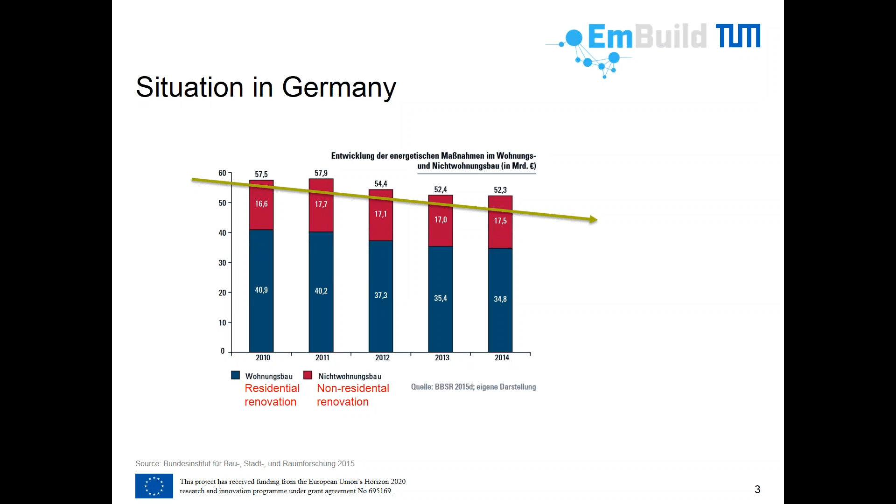I think one of the main tasks in overcoming this situation is implementing and including wider benefits. Here is one sign I like to show a lot: Europe must go deep. We need deep renovation, comprehensive and energy efficient renovation. Just any cost or any renovation maintenance is not enough.

To go straight into the topic of wider benefits, I would like to show you an overview of the variety of topics we can include into renovation assessment. Deep renovation has a lot of impacts on society and on our environment, and these are just a selection of topics we selected and categorized into the three pillars of sustainability to make it understandable.

I would say economic effects are the most interesting for most of the audience. So we have a particular focus on that, especially macroeconomic growth, supporting local small enterprises, companies, producers, but also focusing on economic productivity, competition, markets, research and development, public finances. These are all sections affected by renovation of buildings, especially when we come to property values, asset values, real estate markets.

On the other side, we have environmental topics, which are clear for most to understand: if we reduce energy consumption, we reduce the emission of CO2, we reduce the emission of particulate matter, we have less ecosystem impact, we have reduced emissions indoors, we have better indoor quality, and related to that, we have better productivity.

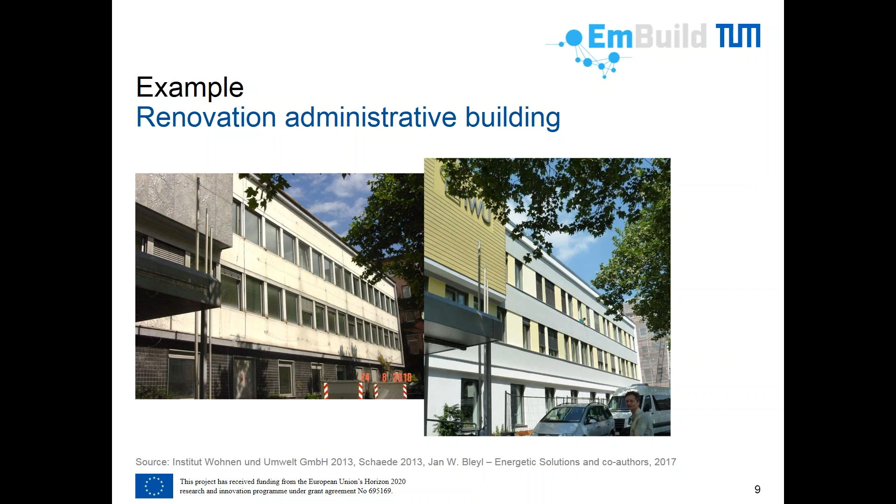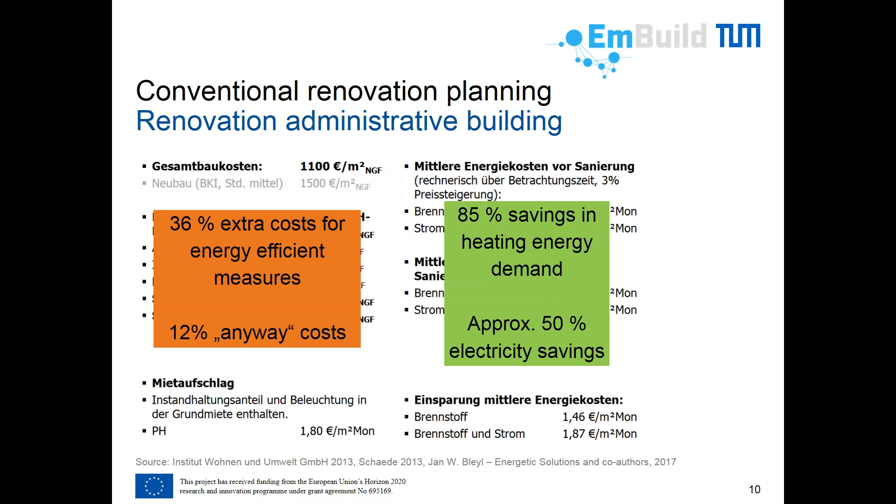What they had, of course, was a quite long payback period—I'd say 25, 26 years, up to 30, sometimes 20 years. These are numbers we all know, and they reflect barriers in the whole renovation process, because these 36% of energy efficiency extra costs are a huge barrier for most municipalities and public offices. So this is where we need to implement and incorporate the wider benefits and the actual financial benefits of energy efficiency renovation.

This is how they calculated multiple project benefits: for example, work productivity increase of about 1%, rental income increase, asset values, CO2 savings if you think about emission trading, and other balancing costs, shadow costs for example. We can calculate and monetize these effects quite well in some aspects. In others, we're still working on it.

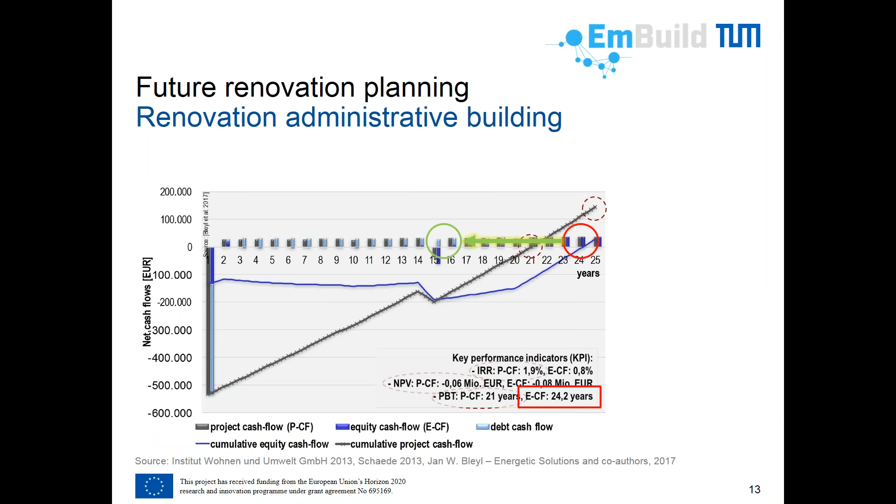This is something I made up, not from the study, just to show that the payback period could be reduced. Our own calculations and other projects show that we can reduce it, conservatively, by up to 5–10%. But this is something we're still working on, and there will be reports coming up this year showing deeper and more detailed calculations in other projects.

Now to the main core of this presentation. It's a methodology we are applying now in EmBuild, which we'll be working on in the next months with municipalities and regions, mainly from Southeastern Europe. I just wanted to briefly introduce this methodology, and I kindly ask for feedback and your opinion about it.

It will be a very broad methodology and approach, incorporating as many benefits as possible across topics, selecting and ranking them for specific uses in specific locations. So not everyone will have the same effects—if you don't have a local business related to construction, you might not see these macroeconomic effects in your municipality when you have deep renovation, but you might have it in other fields. This is what we want to accomplish with this methodology.

Firstly, I want to show you the structure. We work with two kinds of data inputs. One is the municipal data we're collecting from municipalities and public offices—a comprehensive questionnaire, interviews, data analysis, statistical data from national governments—which we compile into a database to analyze the current situation of municipalities related to building renovation and energy, and to make some first analysis.

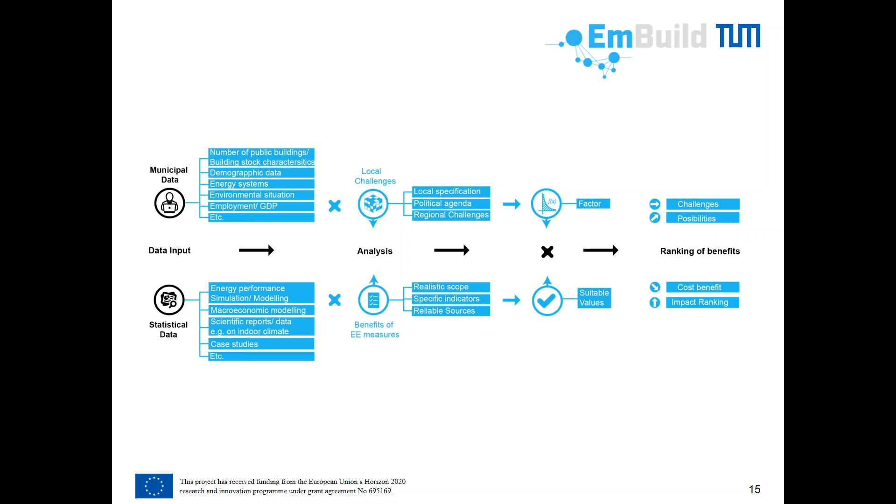The second data input is the statistical and experimental data we have from science, from other projects, from experiential reports, from European and worldwide assessments about wider benefits. We try in this methodology to combine these two data inputs into some ranking and local values usable for every mayor and every municipality public officer, because they don't want to handle numbers from the UK or Germany specifically in other countries—it doesn't work, and I think it's not in the interest of everyone.

At first, and this is what we do now, is we have the indicators and parameter study. We want to identify what actually is important to measure when it comes to wider benefits of building renovation. And of course, we have, again, these social, economic, and environmental topics and categories.

Most of the data has to be measurable. It has to be monetized. It has to have financial impact, of course. And we are now making a set of these indicators, which will be published soon. And these indicators we need to gather data for. We have data from the local authorities and also data from other experimental and worldwide projects, which are sorted into these indicators.

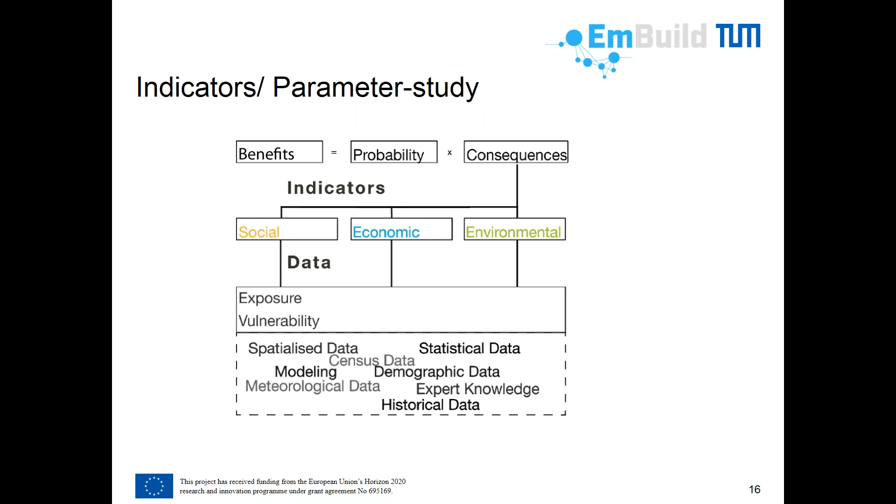As an example, for what is existing and what data we're using, this is an example of various reports, and we have, for example, these 22 jobs per 1 million euros spent, which is a quite average number, I think, for Europe for deep renovation measures.

And what we now want to do is we want to adjust these numbers to local necessities, to local situation, because not everywhere in Europe are 22 jobs created when you spend 1 million euro in building renovation. But this is our task, and therefore we collect local data through an online survey with pre-selected and predefined answers. These answers help us to sort and adjust the numbers that are out there.

You see here a small overview of the back end, with all these different kinds of answers, like how many inhabitants, numbers of buildings, numbers of public buildings, numbers of educational buildings in different countries. Based on these numbers, we can estimate the potential for renovation.

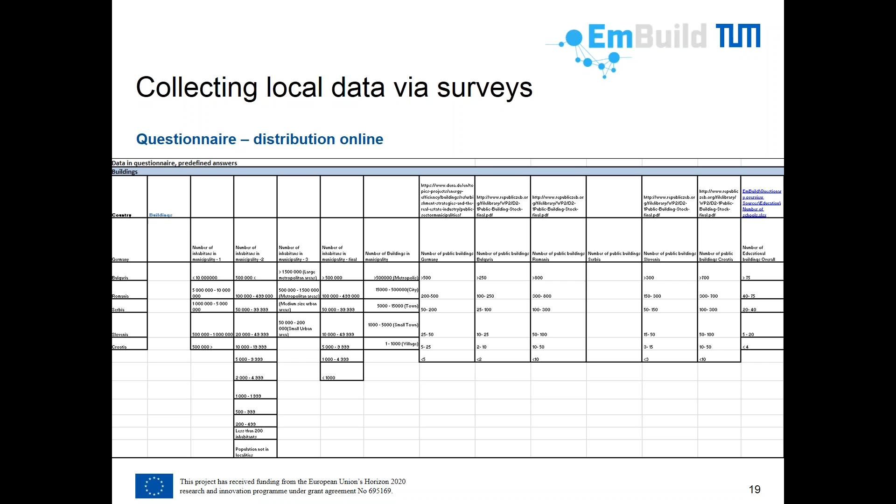And from there on, we can estimate how many jobs might be created in the future, how much social impact, how many health issues we can solve.

And when combining it, for example when I look at the jobs issue, we measure how many jobs are created. Then we measure how complex it is to install this assessment, how complex it is to perform an assessment for a municipality, independent from any research facility or energy agency. How good, or how easy, is it for them to implement that in a local situation?

And also, we measure how much impact we can have with some benefits. Like if we have a deep renovation done on a public building, how much is actually the impact in the next 10, 20 years in different sections, in job creation, also in health - how many health issues do we reduce, how many days of absence, for example for pupils in public schools or employees in the public sector.

How much we can reduce the absent days for them due to health issues with indoor climate or bad building quality. And also we have these specific regional challenges for some countries, some regions. They have a specific need, or an especially high unemployment rate. So for them, the argument of job creation is much more valuable than for other regions - like in Germany, where we have quite a low unemployment rate.

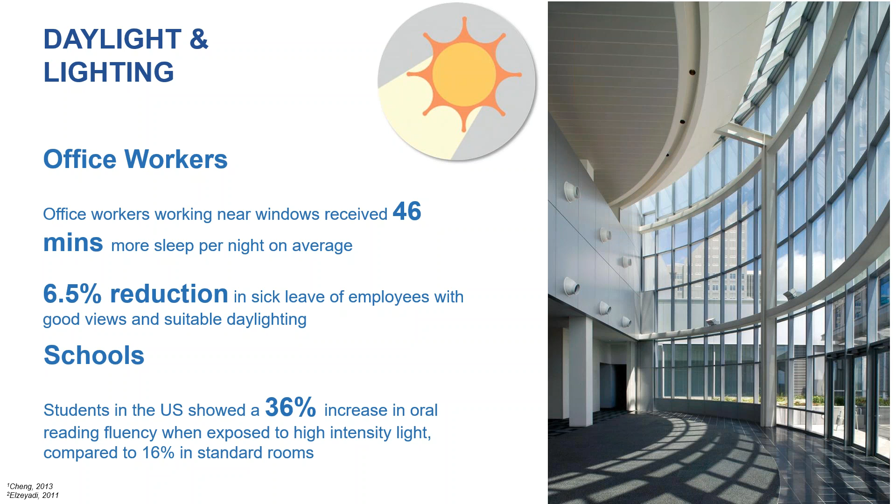In terms of noise and acoustics, in our offices report, we saw, not surprisingly, that 99% of people surveyed said that they had impaired concentration when exposed to background speech or noise, and a 66% drop in performance when exposed to distracting noise. In a study done in France, it found that for every 10 decibel increase in noise, the language and math scores of students decreased by 5.5 points. So again, some really compelling cases to design and renovate these buildings so that these aspects are considered, because it leads to all of these other gains.

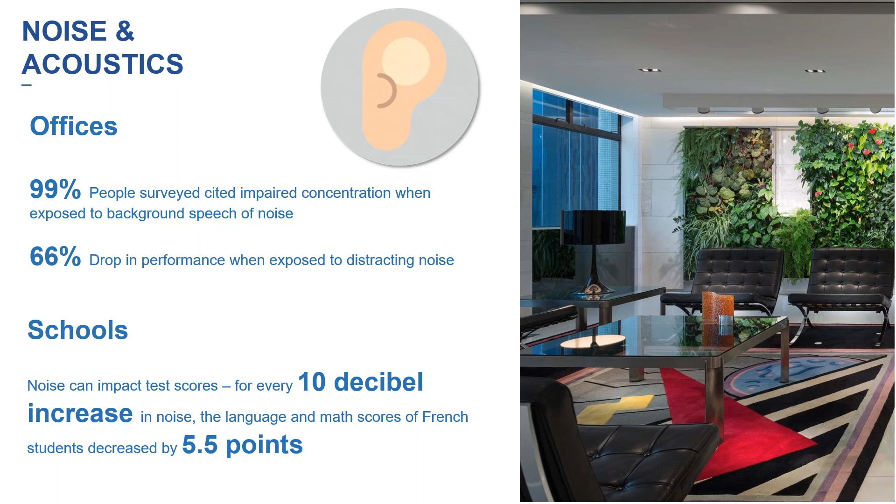Thermal comfort - an interesting finding from one of our reports is that if employees are given access to temperature controls within their offices, it led to a 3% increase in logical thinking performance, a 7% increase in typing performance, and a 3% increase in overall productivity. In schools, students who said they felt comfortable with the thermal comfort in their classrooms were able to achieve 4% more correct answers in a maths test compared to those who were not.

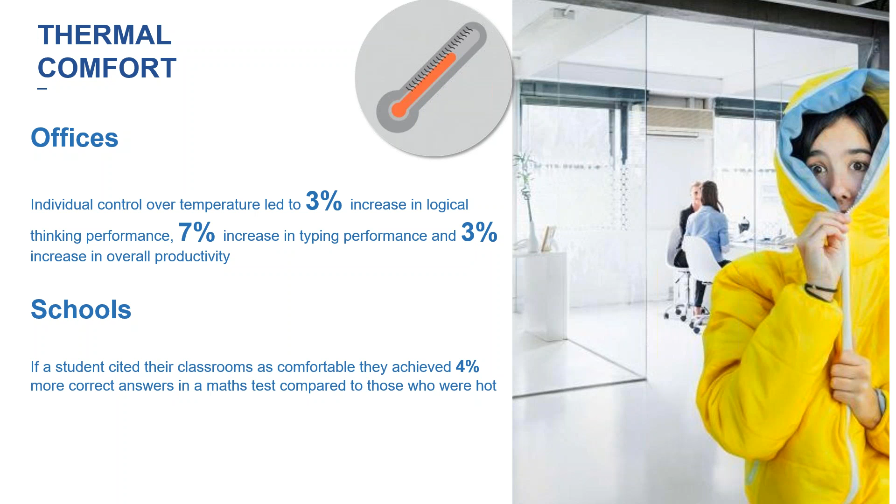Lastly, I'll give some brief stats on indoor air quality. There's quite a big study called the COGfx study with Harvard University that we were part of, which found the impact that indoor air quality has on cognitive scores. We've seen on average a 101% doubling of cognitive scores in green buildings over conventional buildings, and 30% of participants reported fewer symptoms of sick building syndrome. We also have some other stats on schools.

So what we've seen from the body of research we have done is that there's a very compelling case to promote and use the multiple benefits of renovation as an incentive. Now, those are just four aspects that I've addressed, but there's a whole host of other ones we could talk about. So I would encourage you to look at the Better Places for People website, and a new report on the business case for green building will be coming out next Tuesday.

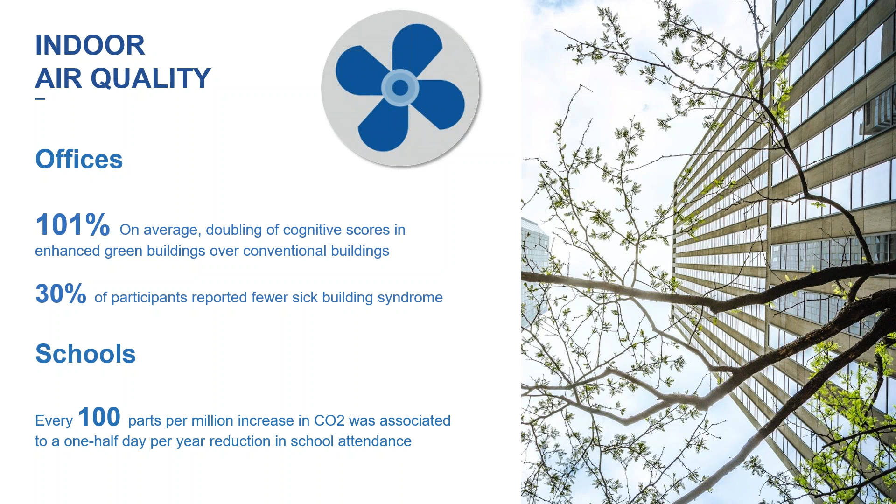So there'll be more case studies and statistics on that, which I find really, really compelling. And once we started compiling all of this research, we've seen more and more that people are beginning to talk about it, and this was particularly evident during the Build Upon project that I spoke about briefly.

Build Upon is the world's largest building project on building renovation. Mariangelo briefly mentioned the requirement for national renovation strategies within Europe, and how a lot of those are designed quite badly. So the aim of the Build Upon project was to bring all of the different key stakeholders together to design renovation strategies that are actually meaningful and impactful, and to co-create those with governments.

What we saw through that process was a very large stakeholder dialogue across 13 countries, and we saw other entities coming to the table who previously had not been involved. For example, in Ireland, they had a local charity because they wanted to address fuel poverty, and employers groups in other countries - really bringing together a diverse set of stakeholders.

And the output of the Build Upon project was a series of recommendations from each participating country on what could be done to drive renovation and to make renovation strategies a lot more meaningful. And what we saw consistently was that national renovation strategies must promote the multiple benefits of renovation.

I've pulled out a few of the key quotes from those recommendations from some of the countries, but I encourage you to go on the Build Upon website to see more. In almost every case, the recommendations talked about promoting the multiple benefits of renovation, whether that was addressing socioeconomic problems, health and well-being, or reduced dependence on fossil fuels. The message was very consistent, that this is a good driver to incentivize renovation activities, and it must be communicated better.

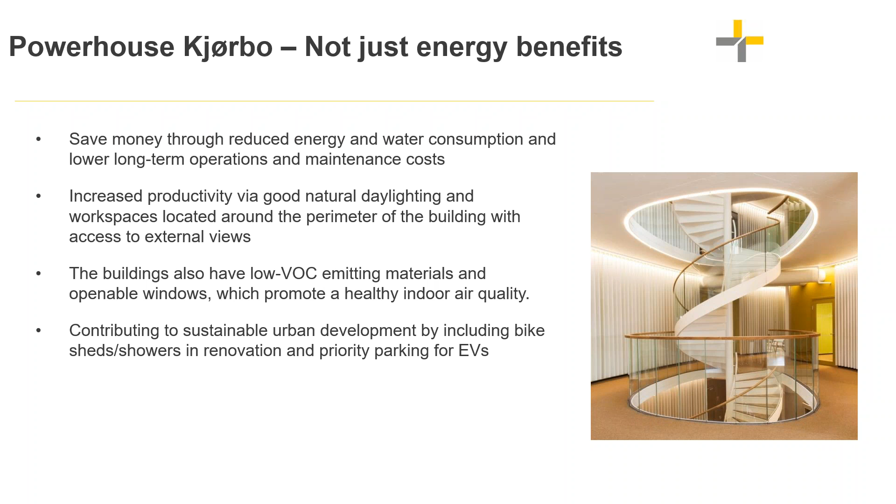Then in Ireland, a very interesting scheme that's currently being piloted by the Health Service Executive and the Sustainable Energy Authority of Ireland is something called the Warmth and Wellbeing Scheme. What this scheme does, it provides energy efficiency upgrades to homes of those who are living in energy poverty, but who also have chronic respiratory conditions.

The aim of this is to make homes warmer and healthier to live in, but also to reduce the attendance of these citizens in hospitals, particularly during the winter months when hospitals will be pretty stretched.

So what would happen is that a patient would go to a doctor or visit a health service executive employee, and they would be referred to the agency responsible for doing this work, and then they would come and assess their house and determine whether or not it is suitable. And if it is, then they would pick from a suite of work - standard attic insulation, wall insulation, boiler replacement, draft proofing, or other energy efficiency related upgrades were recommended.

This is still in its pilot, so we don't have any of the impact data yet, but I think it's a really exciting example of governments actually working across departments to act in a more systemic way and understanding how one thing in the Department of Energy could actually have a positive benefit for the Department of Health. So I think it's well worth keeping an eye on the outcomes of this particular one.

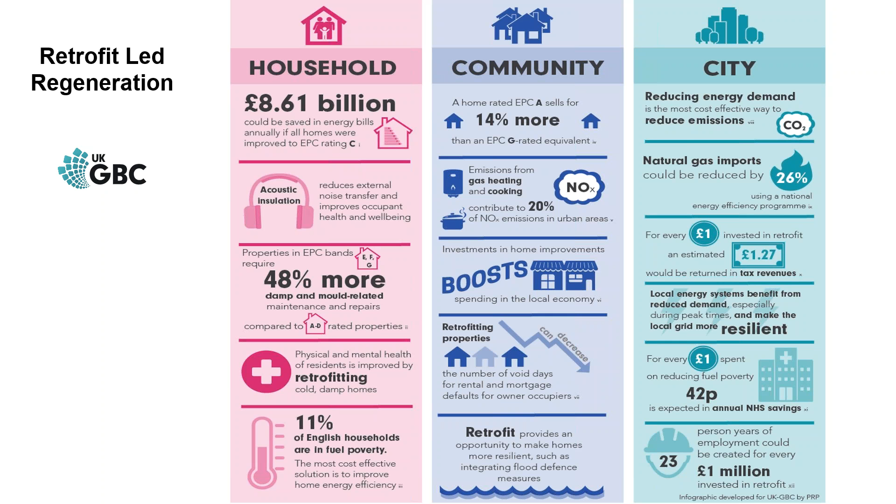And again, it's not just talking about the energy efficiency benefits, but actually it goes beyond that and looks at how scaling energy efficiency or scaling the retrofit can actually have impacts on the whole community.

So again, won't go through this, but just some examples. If you integrate renewable energy into the project, then you could potentially be creating opportunities for community-owned projects to provide an ongoing income stream, and that can be funneled back into the community.

Again, by scaling retrofit activities, there's an opportunity to install electric vehicle charging points. So you're bringing together different community groups, and you're enhancing the appearance of the estate and improving accessibility. So again, a very, very compelling case.

And the UK GBC are now looking at how they might pilot this with certain cities and local authorities in the UK. So again, another interesting example, I think, to keep an eye on over the next couple of months and years.

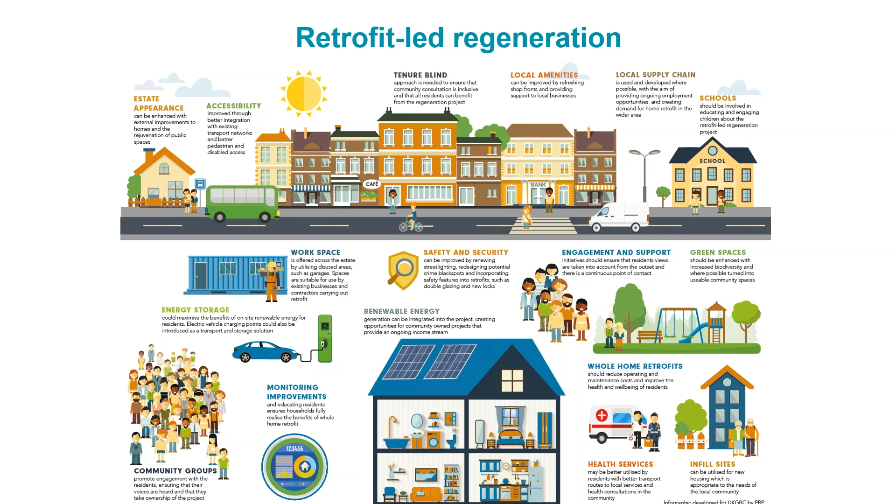And just lastly, I'm going to talk a little bit about a campaign in Poland, which isn't specifically a case study, but I think a very interesting idea. In Poland, a lot of renovation activity is based on multi-family buildings, but there are a lot of single-family buildings with low stacked chimneys, and that's leading to a lot of problems related to air quality.

So this campaign is really aimed at renovating these single-family homes, and by doing that, addressing the problem of low-stack air pollution. Their tagline is "Warm House, Clean Air," and this particular project is still kind of in motion. But I thought it was a really good example of more systemic thinking about energy efficiency benefits. So that's briefly the examples I wanted to go through.

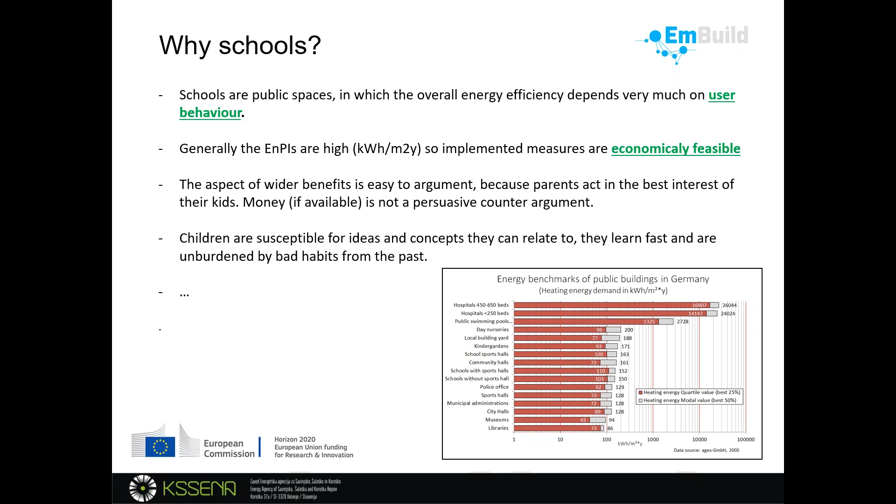The aspect of wider benefits is also very easy to argue because parents generally act in the best interest of their kids. Money, if available, is not a persuasive counter-argument. Children are also very susceptible to ideas and concepts that they can relate to. They learn fast and are unburdened by bad habits from the past. And I could go on, but I think you understand my point.

Take, for example, the 50-50 methodology that was implemented through the Euronet 50-50, also a follow-up project, Euronet 50-50 Max, carried out through the co-financing from the Intelligent Energy Europe program.

We're talking about a methodology that aims to bring about energy and financial savings in a building by actively involving building users in the process of energy management and teaches them environmentally friendly behavior through practical actions. It's comprised of 9 steps that finally result in worthwhile energy savings that can be reinvested into additional measures and activities, creating a sort of perpetuum mobile of positive advancements.

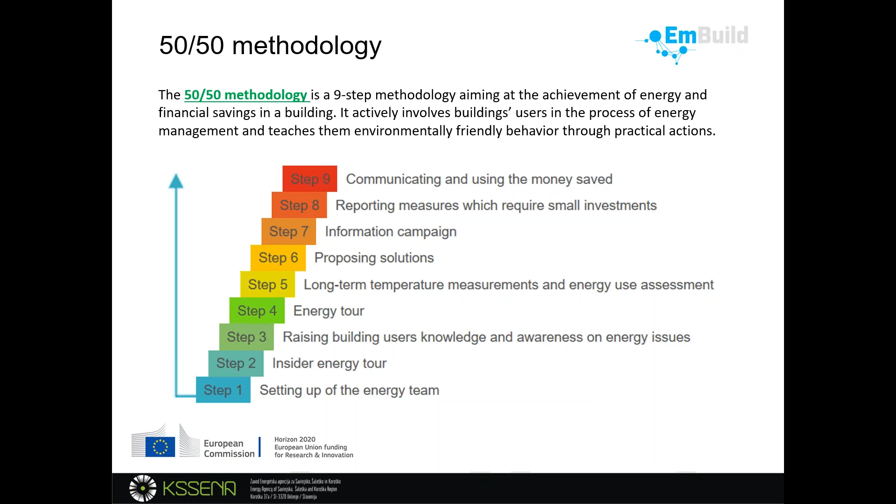The approach is a bit similar to the EPC Light model, if you're familiar with energy performance contracting, also a term coined by German experts. We could conclude that this is a sort of bottom-up approach to energy renovation because it's user-centric. It starts with behavior change of users, followed by concrete investment. This allows us to maximize the impact of the investment, because if a building and all its systems aren't fully automatized, users have a big impact on final energy consumption.

The 50-50 methodology is successful because it addresses and rewards all of the key stakeholders, so they are motivated to engage in such activities over the long term. In essence, 50% of the financial savings achieved is returned to the school through a financial payout, while the other half is a net saving for the local authority that actually pays the energy bills. So in that way, everybody's happy, and benefits to all parties are essential.

Even pupils that form the energy teams acquire additional knowledge, learn about teamwork, are directly rewarded for doing the right thing, and are also excellent ambassadors for promoting energy efficiency within their family circles and amongst peers.

So it's clear that this approach is very successful. Within the Euronet 50-50 project, implemented in over 50 schools from 9 European countries, there were 6,900 pupils, teachers, or other key stakeholders involved. 40 of the 50 schools achieved notable energy and financial savings, which was about 1,100 megawatt hours of energy, translating to about 340 tons of mitigated CO2 or greenhouse gas equivalents that weren't emitted into the atmosphere. So each school saved on average more than 2,000 euros.

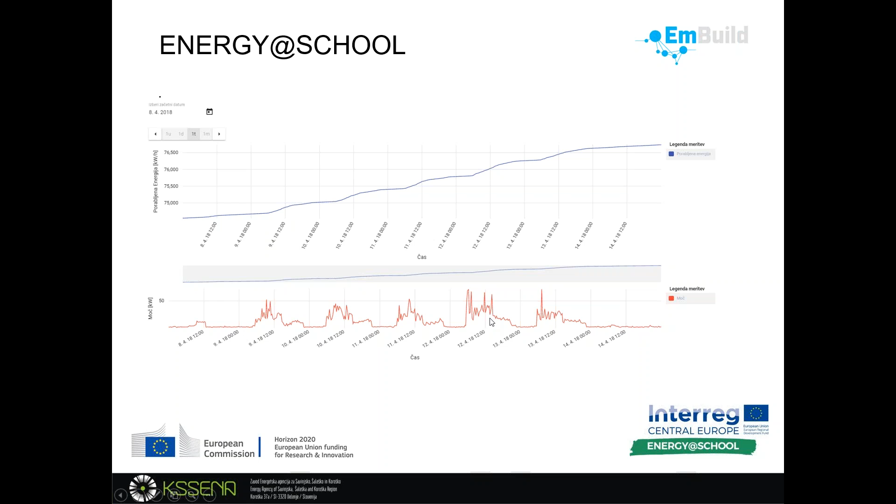This is just a few graphs charting the energy use in a certain building. This is cumulative, that's why it increases in April. This is the power consumption, not energy, but power load. This displays the readout for the 4th elementary school of Celje. They also introduced a way of either turning on or turning off lighting systems remotely, and believe it or not, this is really popular with students—and I don't mean pranks either.

Maybe I would like to turn the story now a bit and focus on the other side of energy renovation, and how to mitigate its negative impacts, or more importantly, how this should be considered in investment preparation and tendering procedures. Especially when renovating or upgrading the thermal envelope of a building, there are several things we should consider. Generally, insulation added on the building's outer envelope reduces the air exchange rate between the outer and the internal air.

This means that concentrations of undesirable gases tend to increase, such as formaldehyde or other volatile organic compounds. The perceived indoor air quality is actually usually better before renovation was carried out, albeit thermal comfort is much lower. Energy renovation efforts must always include measures to also improve ventilation. Very important.

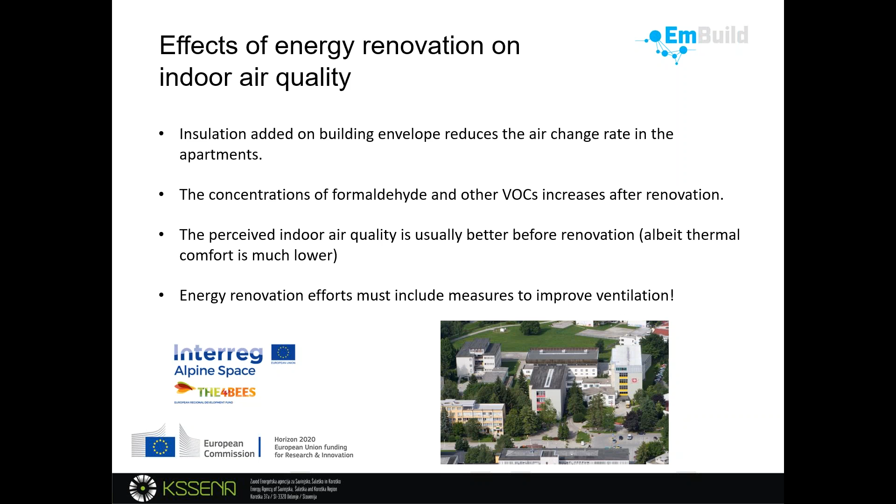We address this within a national pilot carried out within the THE4BEES project, the transnational holistic ecosystem for better energy efficiency through social innovation. We started implementing this project in late 2015. It's based on three main objectives: to influence behavior of building users, to achieve energy savings, and to introduce lessons learned into an amendment of relevant national policy.

The general idea was to acquire concrete data about actual energy consumption, as well as other relevant parameters, such as indoor air quality. This is a two-edged sword, because oftentimes energy renovation measures have wider negative impacts on certain important factors, such as health.

In our particular case, for which you can see a schematic of the sensory network, the school center of Velenje carried out extensive energy renovation of its 5 old buildings. The buildings were constructed from 1959 up to 1984, followed by extensive investment into energy renovation. I think the last one was concluded in 2008.

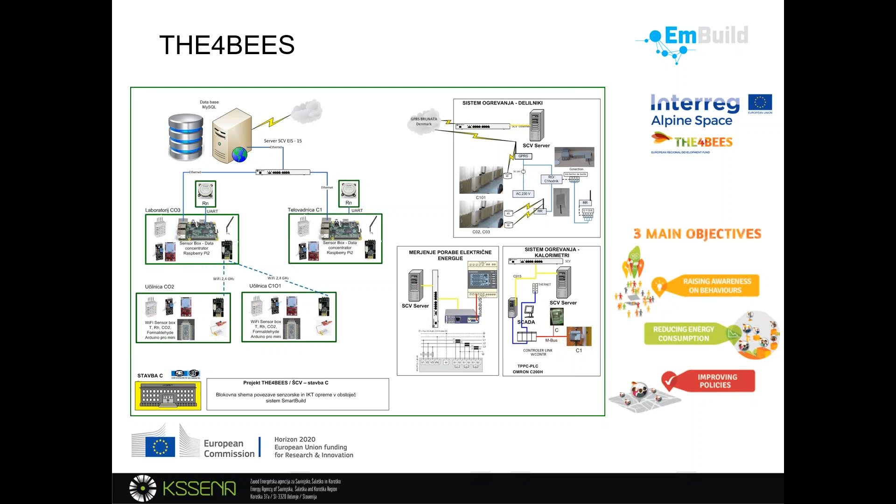Special focus was attributed to measuring indoor air quality, which in our example is defined as a prerequisite and benchmark for monitoring and optimizing energy use with reference to existing health and safety standards. To this end, the developed sensing network measures indoor levels of carbon dioxide, formaldehyde, and radon gases.

CO2 was chosen due to its negative effects on concentration and overall learning ability, although it's quite impossible to create a situation where the gas would actually be toxic.

On the other hand, formaldehyde and radon are highly hazardous gases that were assumed as being problematic in the context of energy renovation, which generally reduces the air exchange rate between the interior and exterior, causing in many cases the increase of such compounds in the internal air.

Furthermore, radon is formed from radium in the decomposition series of uranium within the Earth's crust and rises to the surface, where it releases into the atmosphere, or in our case, accumulates in enclosed spaces, meaning caves, mines, or even buildings.

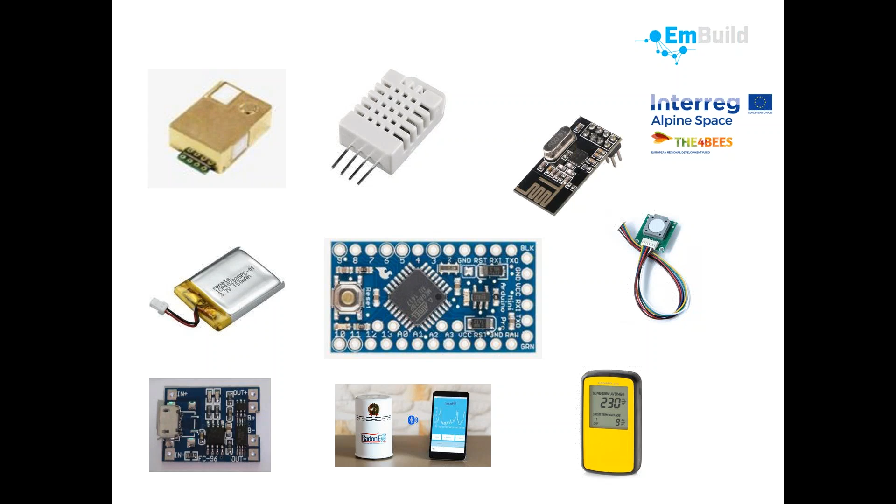So I think it's time to sum up, because it's already past 4, so let me make some conclusions. Energy renovation should always be considered with the bigger picture in mind. Partial renovation will not nearly achieve as much savings and can cause significant negative side effects, as you can see from my presentation.

I also invite you to look at a study done by Ecofys, the renovation tracks for Europe up to 2050, which looks at different levels of renovation and basically concludes that the most effective, cheapest option is to go for comprehensive deep renovation. So please have a look at that study, it's really worthwhile. Also for countries, it's really important that wider benefits can be considered within public tendering procedures.

We can only claim wider benefits if they are quantifiable and/or measurable. So IT support, like for example advanced energy monitoring information systems, is and will also remain crucial in the future.

Unfortunately, we must also be aware of the fact that the world is viewed through a prism of currency. And until that changes, wider benefits are considered as an addition to an otherwise feasible business case. Otherwise, they are commonly disregarded. This is why they should be quantified and expressed in monetary value, so we're able not only to analyze their actual impact, but to also make decision makers understand that it's in their best economic and general interest.